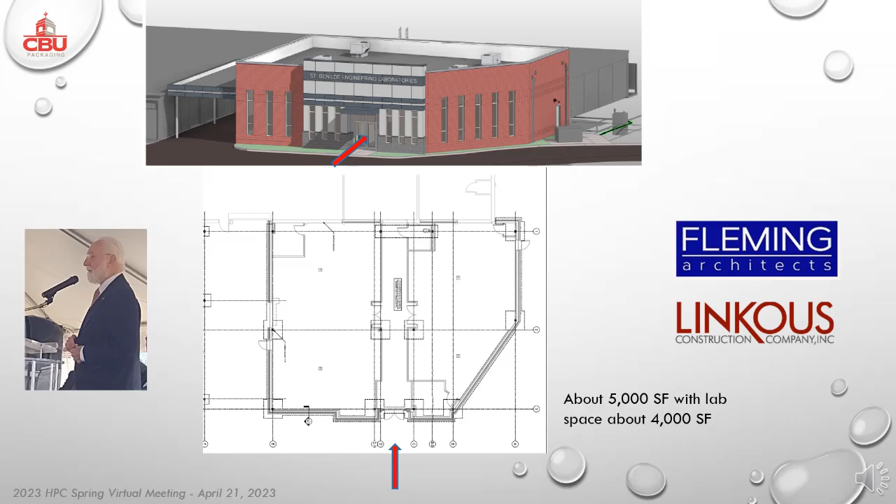The groundbreaking ceremony occurred on February 14, 2023. More information can be found under News on the CBU website and from an article on the Memphis Business Journal.

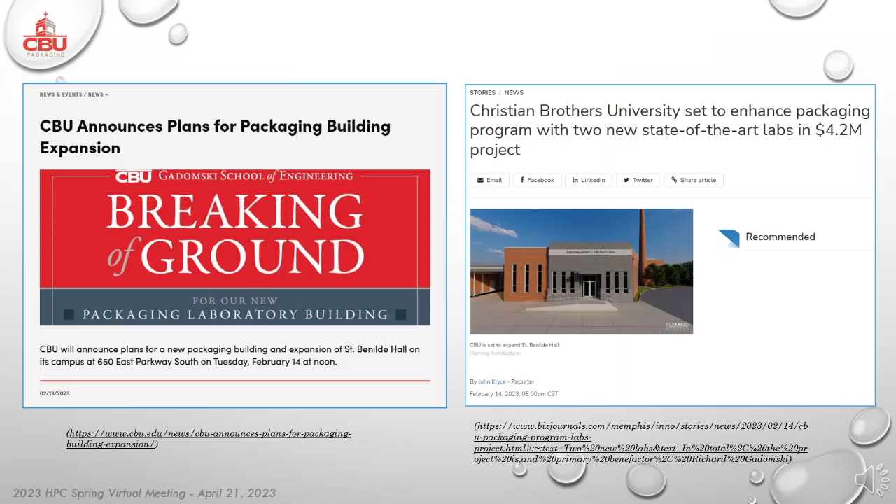This floor layout shows two packaging labs, divided by a walkway from the entrance into the existing lobby of Benilde Hall. The new building is considered an addition to the existing engineering lab building. The new building code requires a gender-neutral restroom, which does not exist in the existing building. The north part of the hallway is for the thermal and material lab, while the south part of the hallway is for the distribution lab.

The distribution lab is home of our existing ISTA-certified transport testing lab. The thermal and material lab is home of our future ISTA-certified thermal testing lab.

An equipment moving pathway was planned. It connects the two labs together, with a short crossing over the hallway. This allows the moving of equipment from the delivery area south of the distribution lab, to the thermal and material lab. Tables and chairs on this equipment pathway can be easily moved out of the way when needed. At least 3 feet around equipment is provided for equipment operations, and at least 2 foot space is provided from a wall.

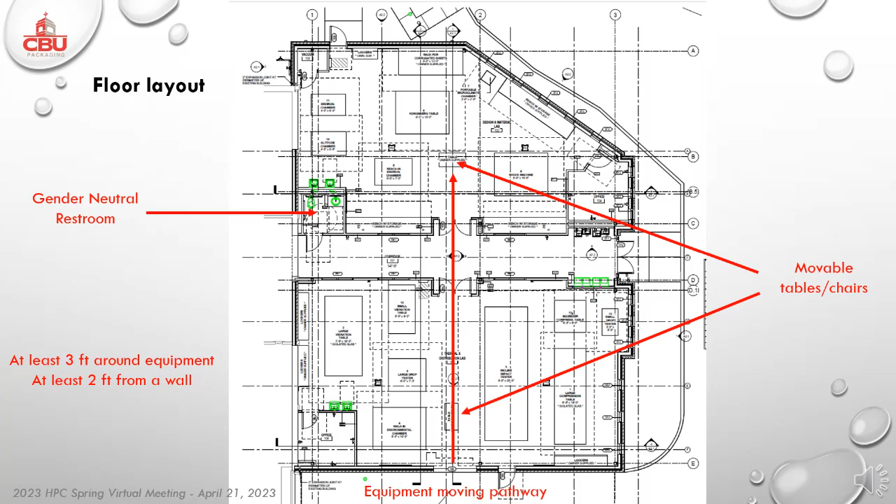This slide shows equipment locations in the thermal and material lab. Two new pieces of equipment are highlighted. The one labeled number 7 is a portable microclimate chamber, a small environmental chamber perfect for material research using small specimens. Another new piece is a 64 cubic foot reach-in environmental chamber. Together with the existing 32 cubic foot chamber, we will be able to handle multiple projects in the future. The existing altitude chamber is also useful for thermal studies, when humidity is not required.

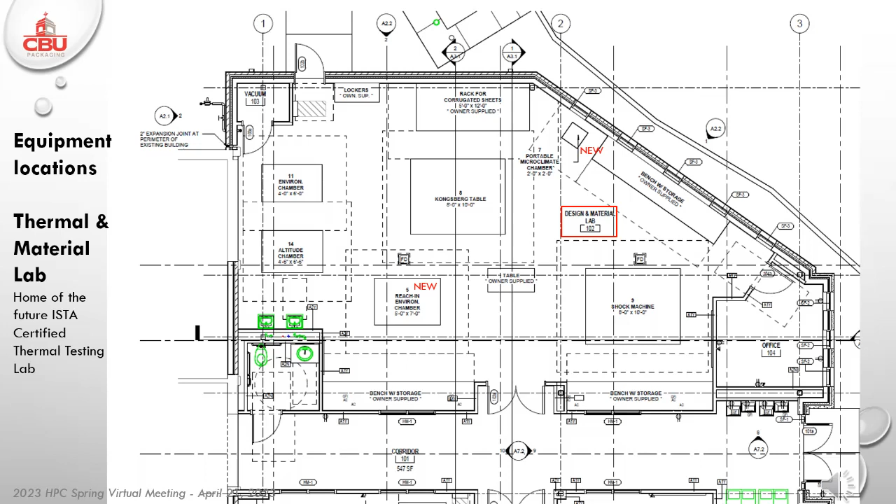A new rack for corrugated sheets is placed near the Kongsberg cutting table. It will allow corrugated sheets to lie flat without bending. Other pieces are existing equipment, including the Kongsberg cutting table and shock machine. Small tabletop equipment will be on benches around the lab.

This slide shows the equipment locations of the distribution lab. There are several new pieces including a large vibration table, large drop tester, walk-in environmental chamber, incline impact tester, and large compression table. Other existing equipment in this lab includes a small vibration table, small drop tester, and a small compression table. There are lockers along the walls and an office in the lower left of the lab.

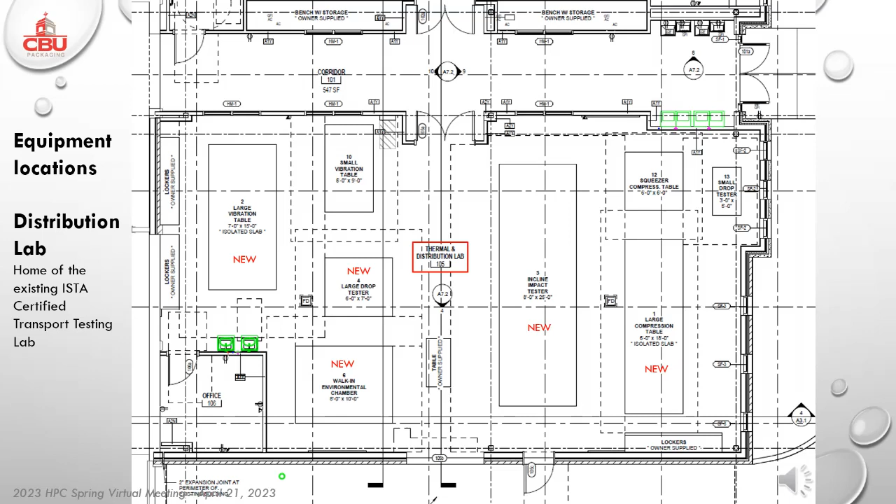There will be 3 new environmental chambers. The microclimate chamber is small and portable, perfect for material research. The 64 cubic foot chamber allows us to handle more packaged products than the current 32 cubic foot model. The walk-in chamber will allow us to place 2 pallet loads in it for conditioning. Please note that all chambers are from Cincinnati Sub-Zero, which makes it more convenient in terms of maintenance, calibration, and repair.

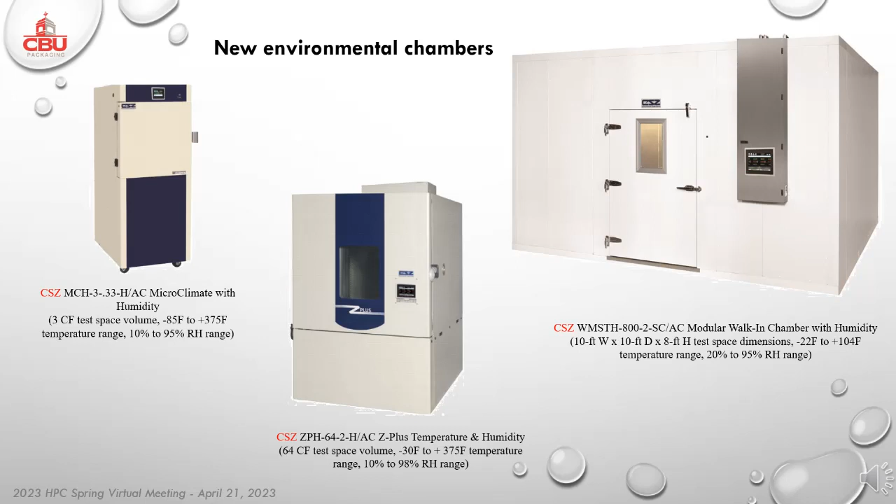There will be 4 new pieces of distribution testing equipment. All of them replace the old or existing ones. As with the chambers, all new pieces will be from the same vendor, in this case, Lansmont.

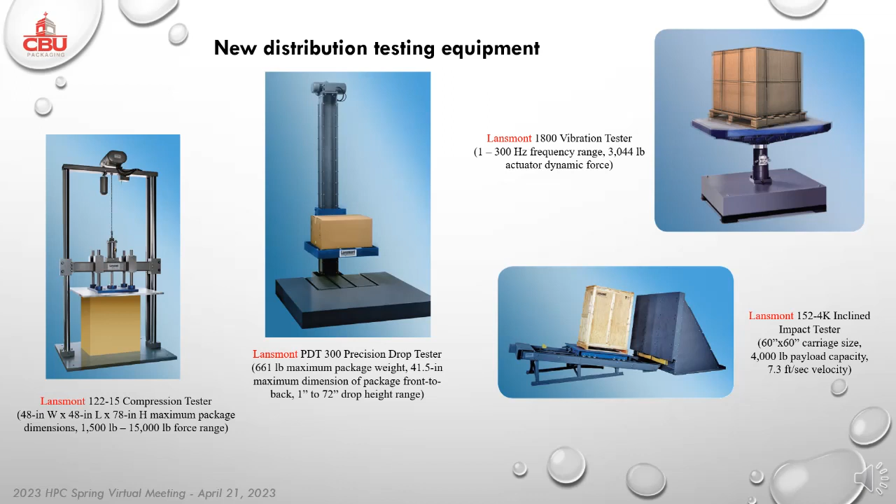Ceiling height is controlled by the tallest equipment. In our case, the walk-in chamber is the tallest. The chamber itself is 10 feet and 4 inches tall. However, there is a condenser on the top, which is another 20 inches, or 1.67 feet.

For maintenance, the chamber needs at least 5 feet clearance to the roof. These add up to 17 feet. The ceiling height was designed for 18 feet 4 inches. Some locations will have less clearance due to the roof joists, but joists are spaced out and give room for maintenance.

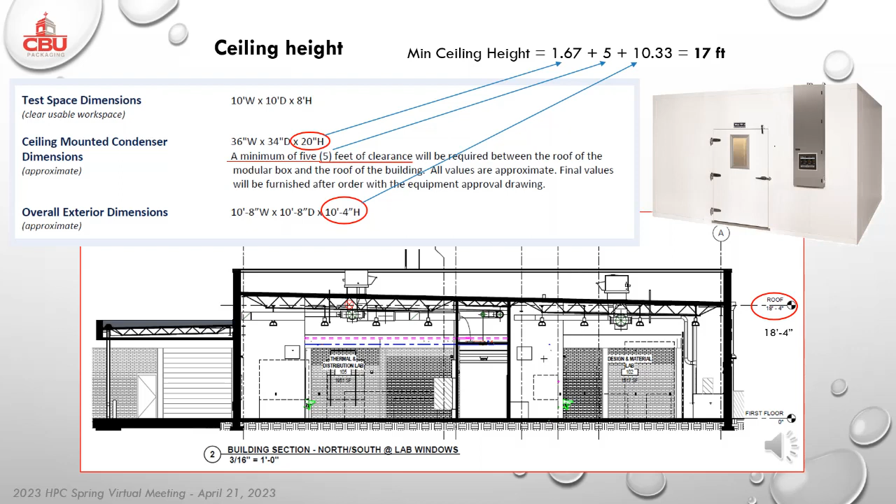It is desirable to perform a test under a desired environmental condition. Most of the time, packaged products are conditioned at a desired environmental condition in an environmental chamber, then tested in the ambient lab condition after conditioning. It takes time for humidity to change, however temperature can change fairly quickly.

With the walk-in environmental chamber, tabletop equipment can be put on rollable benches and rolled into the walk-in chamber for testing. We will be able to test under -22 F, 104 Fahrenheit, and relative humidity from 20% to 95%. Tests on this tabletop equipment are of short duration, so it should be safe for the test operators.

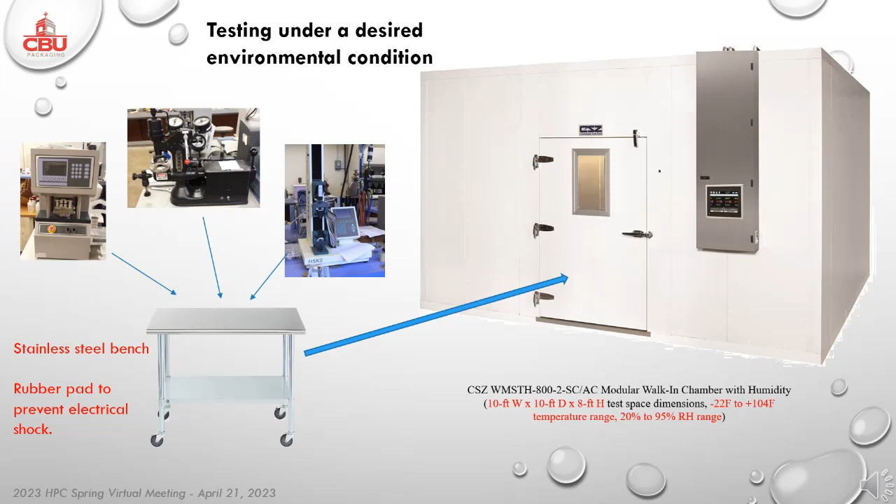Also, we plan to use a stainless steel bench. A rubber pad placed underneath the equipment would prevent electrical shock or short circuit.

Heat rejection is the heat released from an environmental chamber into the lab during operation. If significant, it can affect the temperature in the lab. An experiment was set up in an existing polymer and packaging lab, where the 32 cubic foot chamber is located. Three temperature data loggers were placed in three locations: near the chamber, near the lab entrance, and on a corner far away from the chamber.

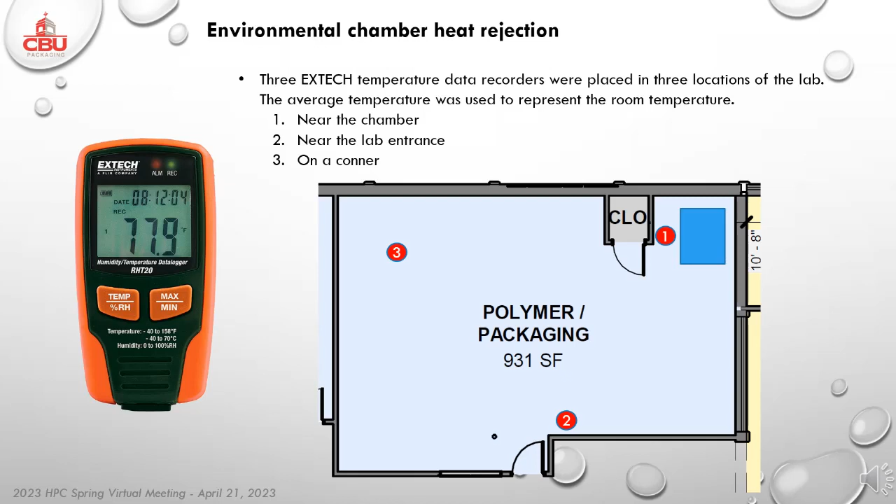This slide shows results for two cases: one with a very low temperature at -29°F, and another at a very high temperature at 300°F. In both cases, the chamber started in the afternoon and ran for about a day. The change in average temperature was very little; the graph simply followed the ambient room temperature, which was lower during the night.

It should be noted that more heat rejection occurs when the chamber is operating under low temperature. The chamber pulls heat out of the chamber interior to keep it cold, and this heat is released into the air. One can feel warmer near the chamber.

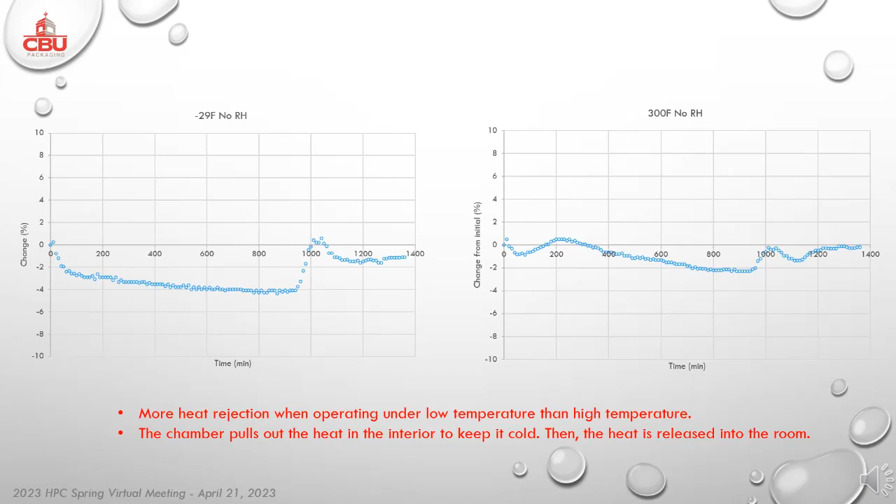The worst situation we have run for our lab customers was -29°F for 72 hours, so we ran a case for that condition. The graph on this slide shows the temperature increased near the chamber for the first 60 minutes, giving about a 2 degree rise in 60 minutes. The heat rejection was then calculated to be 424 BTUs per hour.

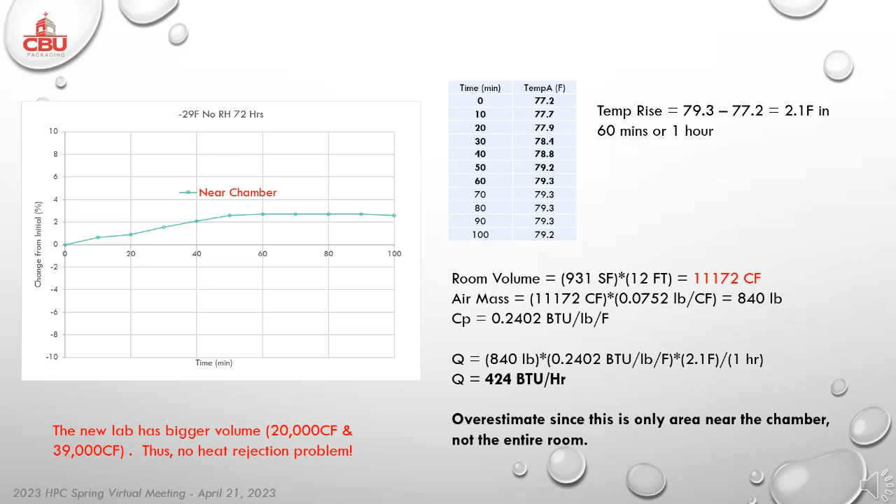This is based on data collected near the chamber, so it is not a real representation of the entire lab. This concludes that there is no problem with heat rejection. Also, both new labs have bigger volume, so heat can dissipate out into the big room, and its effect on HVAC will be very minimal.

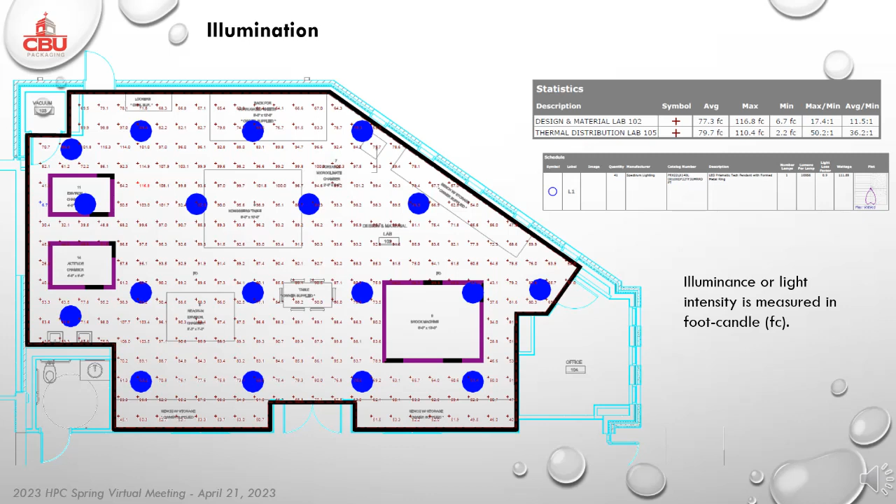Illuminance, or light intensity, is measured in foot candles, or FC. The electrical engineer on the design team designed the light intensity for an average of almost 80 FC in both labs. This is in the range of recommended light intensity for indoor working space.

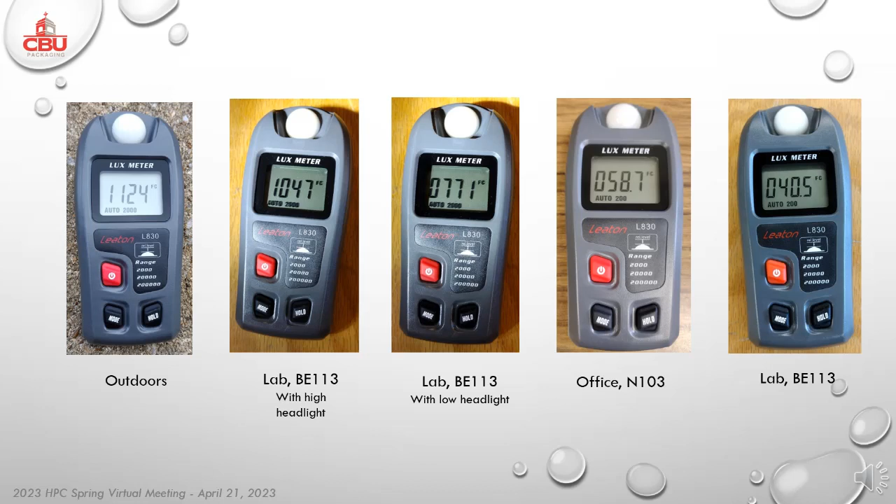A light intensity meter was acquired. This slide shows different foot candles under various ambient conditions. When more light is needed, it is more economical to get additional light from a headlight instead of designing the lab space with higher intensity. In conclusion, involving in the design of this lab building gives opportunities to learn something new.

Designing a new lab building is more challenging than an office building due to equipment. For example, many pieces of packaging equipment are big, power supplies are not consistent, such as 110 vac, 208 vac, 240 vac, etc., and some need compressed air and some need water.

Moving existing equipment to the new facility has to be planned ahead, and when installing new equipment, we need to be flexible—you may not get what you want. Other considerations include budgetary constraint and time consumption. It is also important to get the contractor involved early on.